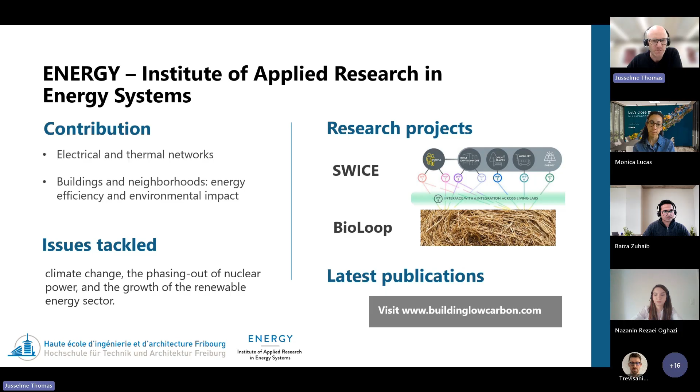As you know, we face different challenges. We have multiple goals to reach, climate goals and climate neutrality as of 2050. The built environment is a significant contributor. We do a lot of research to try to improve tools and methods to support the whole value chain to move into this climate transition.

What we observed during the last couple of months and years is that we need to better link and bridge the community between practitioners and researchers. There is a lack of awareness about the embodied carbon issue into the built environment. Policymakers and regulatory bodies are now looking to regulate the sector, so we really need to build a community around life cycle assessment of buildings and embodied carbon emissions.

That's why we decided to launch this webinar series in the context of the future EPBD, the Energy Performance Building Directive, that will make mandatory life cycle assessment of buildings in 2028. So it's only now almost 3 years away. More specifically, in the Swiss context, we now have a new norm that sets some targets for the embodied carbon of buildings, which is followed in Europe by different countries that already regulate this sector.

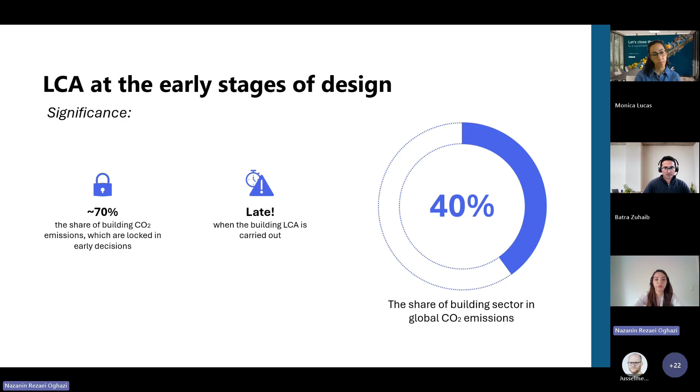However, life cycle assessments come too late to the design process to actually guide those early decisions. So to elaborate a bit more on this concept, I want to borrow from a simple yet powerful statement in business and finance, which says: if you don't measure, you do not improve. And I think in the context of life cycle assessment, it requires an important adverb, which is early.

This concept has been very well depicted in the MacLeamy curve. Some of you may already know it. The MacLeamy curve says that architects, engineers, and basically all the players in the building design procedure concentrate their efforts on later stages of design, typically technical and developed design. These efforts consist of energy simulations, comfort simulations, life cycle assessment, and so on.

However, there's a need for a shift to concentrate all these efforts on the earlier stages of design, and to be more specific, at the schematic design phase, which is typically between week 1 and week 12 of the design procedure, in order to influence the design for good at the lowest cost.

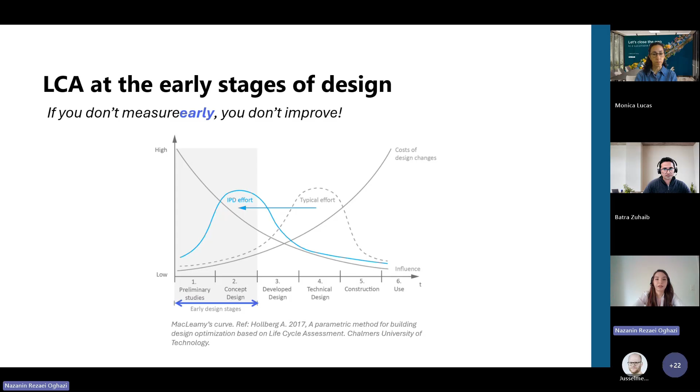While it is evident that we need to perform life cycle assessment as early as possible, it comes with a bunch of challenges and hurdles. If I want to put all these challenges in just one statement, I would say there is a fundamental mismatch between life cycle assessment and the context of a design process.

To be more specific, I articulated these main challenges in 5 points. First of all, we need a high resolution of details. We need information regarding the choice of materials and components, their dimensions, the configuration of facade, interior and exterior elements, HVAC sizing, and so on. However, much of this information is missing or very blurry at those early days.

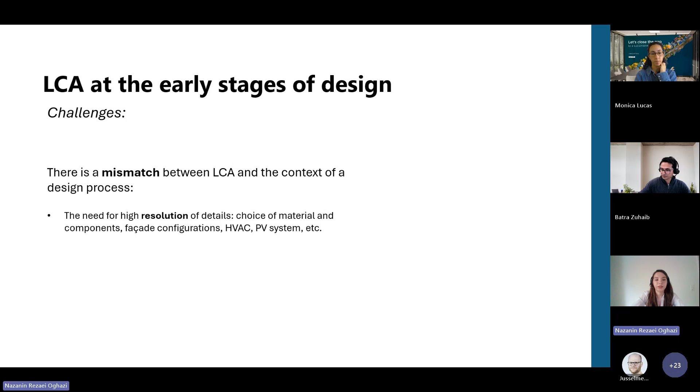Besides, we need to consider a multitude of design parameters that actually affect life cycle assessment results, which based on existing research can vary between 14 to sometimes even 30 design variables, which makes life cycle assessment super complex, not only at earlier stages of design, but also in later stages of design.

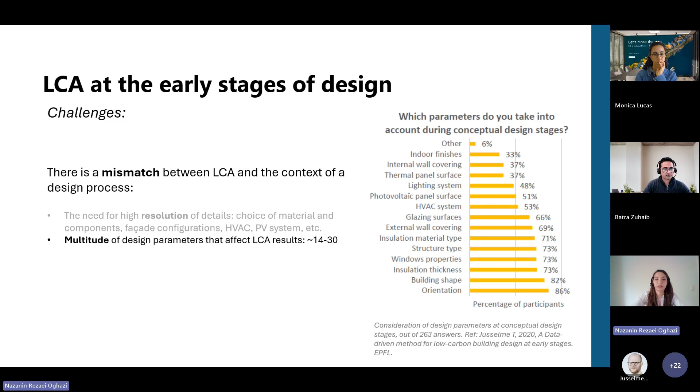Life cycle assessment is inherently a time-consuming task. It can take, based on existing surveys, up to 34 hours even with using computer software. And we can see in practice that for larger-scale, complex projects, it's even more.

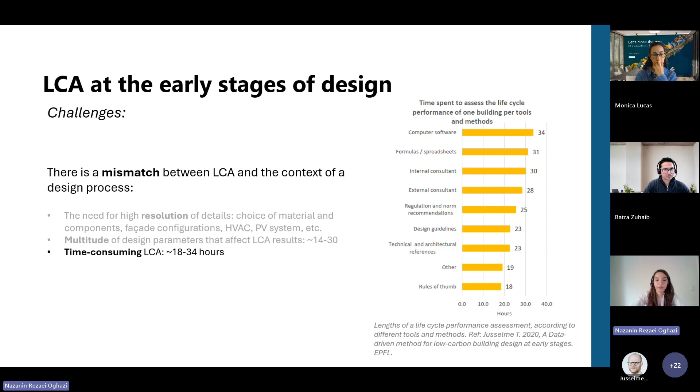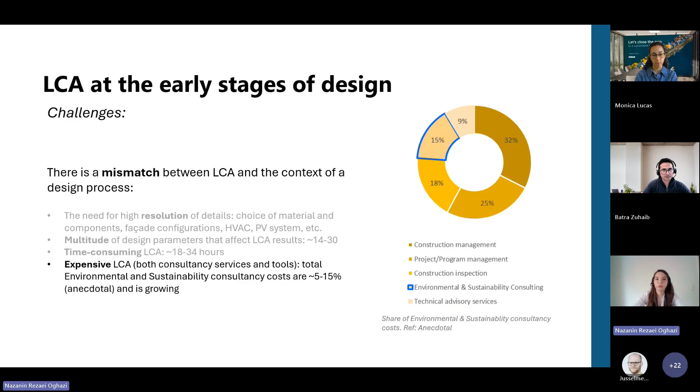This is why life cycle assessment is typically a relatively expensive task, both in terms of consultancy services and required tools. Based on the anecdotal data I gathered, the cost of environmental and sustainability consultancy, including life cycle assessment, can take up to 15% of total consultancy services. And this number is even growing due to the global push for regulatory compliance.

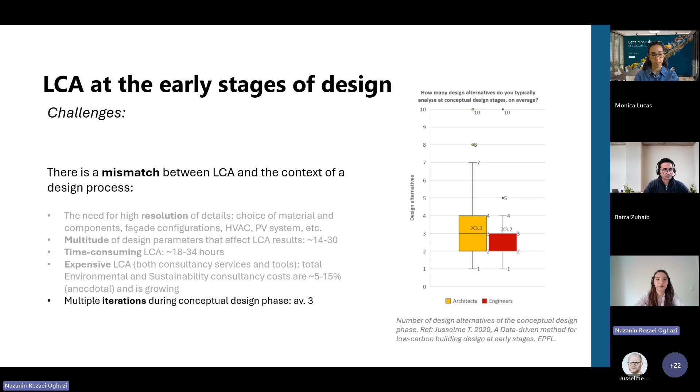And finally, we not only need to perform life cycle assessment once, but more than once. Based on existing research, we have to repeat life cycle assessment 3 times at those early stages of design, because architects and engineers prefer to work with alternatives, typically 3 alternatives and sometimes even more. So these are the main challenges of performing life cycle assessment at the earliest stages of design, but let's imagine we can overcome all these challenges.

You may ask yourself how. You have to wait until the last part of my presentation.

Let's imagine we can have reliable LCA outcomes at the schematic design stage. So here comes a very important question: is the design good enough to pass on to design development or not? Or in other words, is the design in line with the global carbon budget or not?

So here the concept of carbon budgets and benchmarking becomes very important, and the mantra in my head changed to: if you don't benchmark early, you do not improve. So I want to move to the next topic, which is the carbon budget at the earliest stages of design.

I know our audience in this webinar is international, but I want to give a little bit of context in Switzerland. There are some efforts in norms and research to formulate some kind of carbon budgets. The first instance can be found in the 2000 Watt Society, introduced in 1998, which tries to limit each individual's environmental footprint to only 2000 watts, from which 1500 watts must be from renewable resources.

20 years later, the Swiss Society of Architects and Engineers published SIA 2040, which recommends limit values for construction and operation of buildings, recommended to be around 12 kilograms CO2 equivalent per square meter per year.

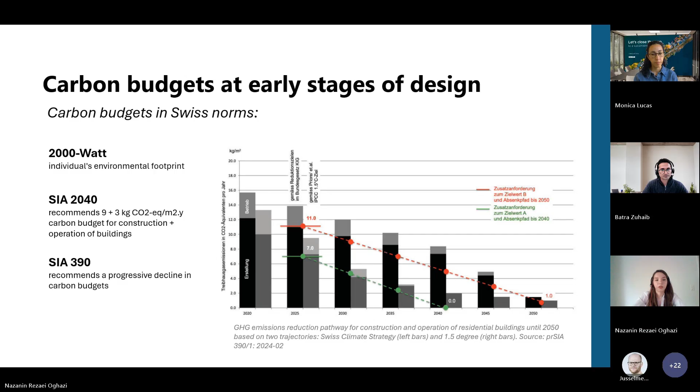If we look at the scale of these carbon budgets in this existing research and norms, we can see that all the efforts are focused on formulating carbon budgets at the level of the whole building.

These building-scale carbon budgets are useful and valuable benchmarks, which often guide high-level decisions, such as whether to build or not to build a building at all, the compactness, the size of the building, whether to apply for Minergie or SNBS goals or not.

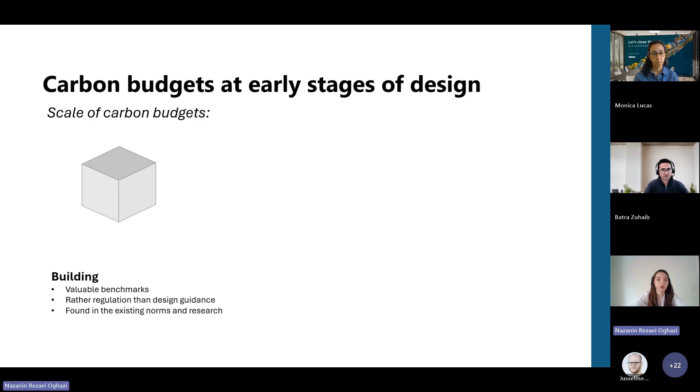However, these budgets are not sufficiently detailed to guide decisions regarding the choice of materials and components. In other words, these building-scale carbon budgets are not sufficiently detailed to guide the day-to-day tasks of architects and engineers.

So if architects and engineers have these detailed carbon budgets, they are able to make detailed decisions and focus on making the best choice for every single component of the building without having to deal with the complexity of the building as a whole at once.

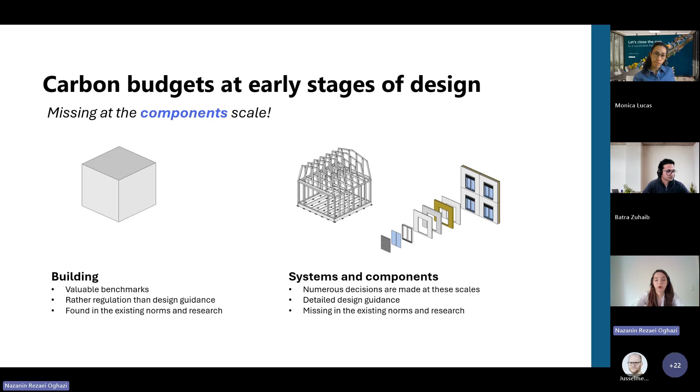However, at the time I did my research, such carbon budgets at the level of components were missing. So I used the method of

target cascading in order to cascade, or in fact decompose, the building-scale carbon budgets down to the level of each and every component of the building.

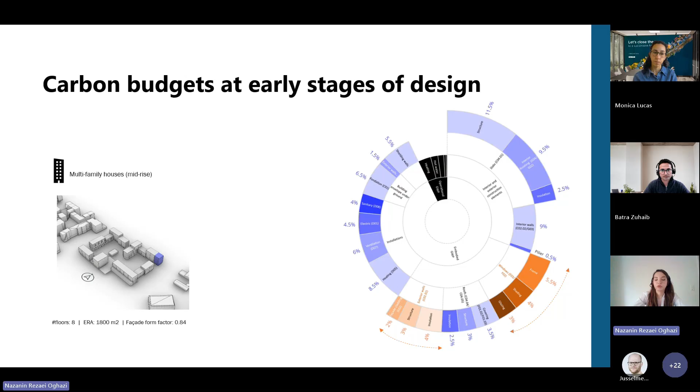So I decomposed the building into 21 constituent components and defined a carbon budget for each and every single component of the building.

And then I calculated not only the carbon budgets for the time being, but also from now until 2050.

Let's say you have a building that is going to be constructed in 2030 — you can already start working on making the choices and dimensions for the facade of this building using specific carbon budgets for every component of

the facade. And finally, the explorative LCA methodology that I developed during my PhD. If I want to put it very simply, what is explorative LCA? I would say

it is basically making a knowledge database of thousands of design alternatives and coupling it with a design exploration interface, which makes it possible to navigate through these design alternatives.

You may ask yourself, what is a knowledge database of design alternatives? It is basically design alternative BIM models, including the geometric and semantic information of each design alternative, together with their

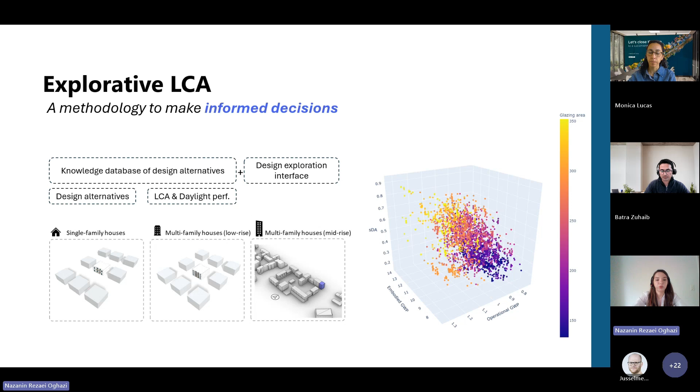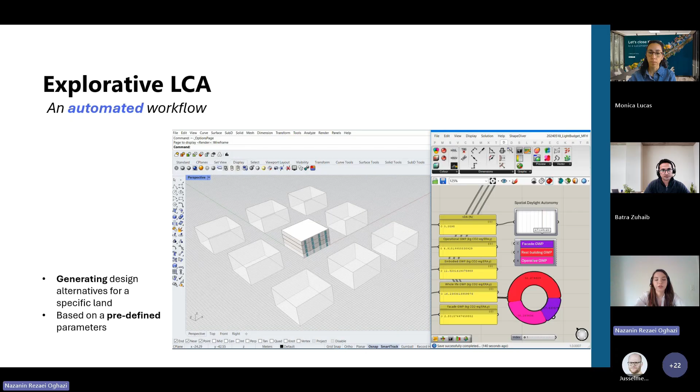So basically, the main value or idea of explorative LCA is to automate the workflow. It allows for generating thousands of design alternatives based on predefined parameters. These predefined parameters were sieved through sensitivity analysis to make sure they are among the most influential ones.

I had the chance to evaluate my methodology through a lab usability test in the frame of a project called Light Budget Project, a 3-year long project that I managed previously. My explorative methodology, along with some limitations, was evaluated as efficient, reliable, informative, and easy to use.

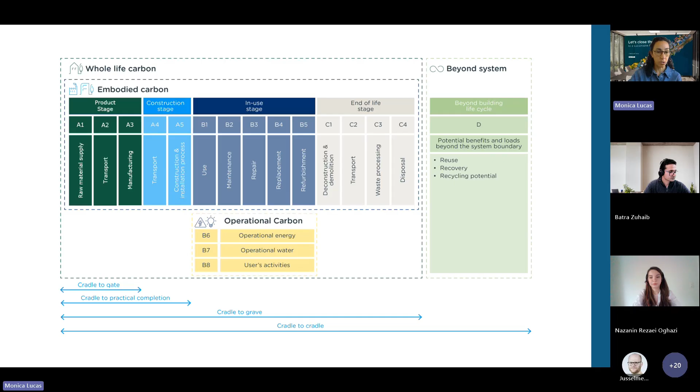When I mentioned 70% of emissions are released before the building is ever used, I was referring to what's called the product stage, phases A1 to A3 in the table. This is a representation of a whole LCA analysis. The first phases, everything in green, are what happens before the construction stage, meaning what we can actually do when we are designing, taking decisions, and forming the whole project.

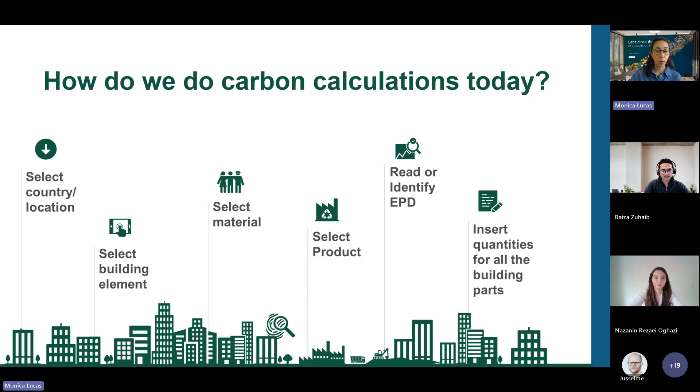So how do we do these carbon calculations today? As a simplified method, this is basically what you need to do. You need to know where it's located. You need to select if it's a wall or slab, and then you select maybe some material.

If you know the product you selected, otherwise you just assume, and then you put in the quantities. Once again, you don't need to know anything about the project. This is pretty much what any software will ask you, and there are several softwares that will allow you to do this.

And then the question is, who is doing these calculations today? It's actually sustainability engineers or environmental consultants. I know that it's changing, and this is part of my daily work. It has been changing continuously, but the fact is that sustainability consultants are the ones in charge of this.

And if we look back once again to the parameters and what we need to know for doing any carbon calculation, these are actually parameters that the designers decide while they are dimensioning, or when they are calculating things with other disciplines, deciding how the project is going to be formed together with the architect. So basically, all of the parameters that any designer works with and decides in the early phases.